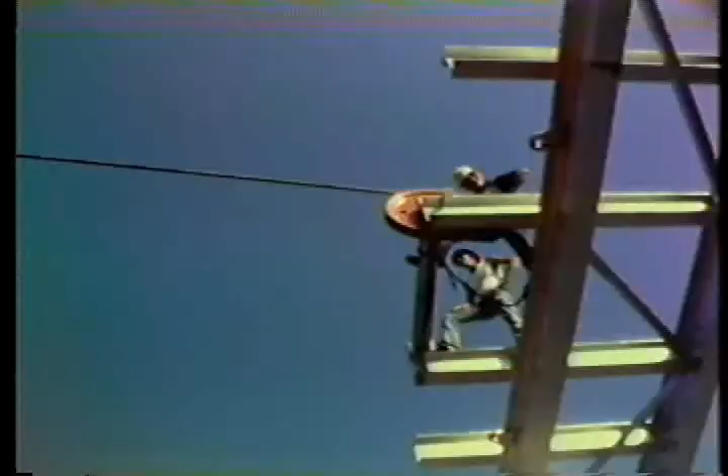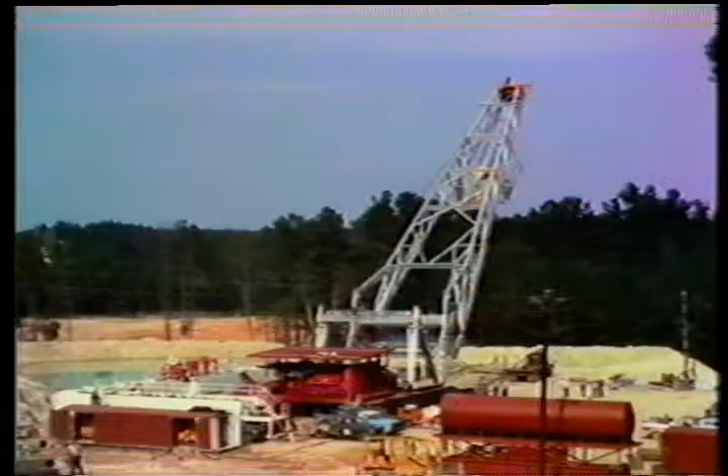We'll look at how your equipment affects the life and reliability of the drilling line. We'll show you what you can do to extend the service life of the line and avoid damage that could jeopardize your safety. In a minute, we'll look at the deadline anchor, deadline stabilizers, crown block, traveling block, wireline guide, and the various parts of the drawworks.

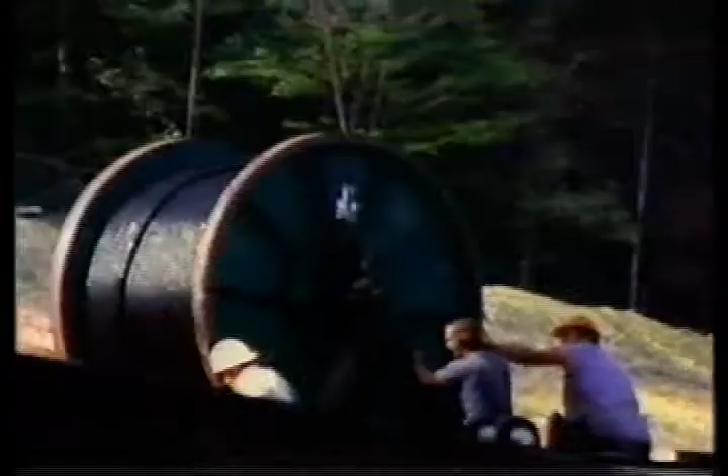Let's start at the beginning, when a new drilling line is delivered to the rig. When a line is delivered to you, inspect the outside layer for damage. If it wasn't loaded or tied down properly, there could be broken wires called wickers, or there could be flattened strands. When a spool is loaded properly, the load chains are not in contact with the wire rope where they could cause damage. When unloading, don't roll the line through mud or water or over sharp objects.

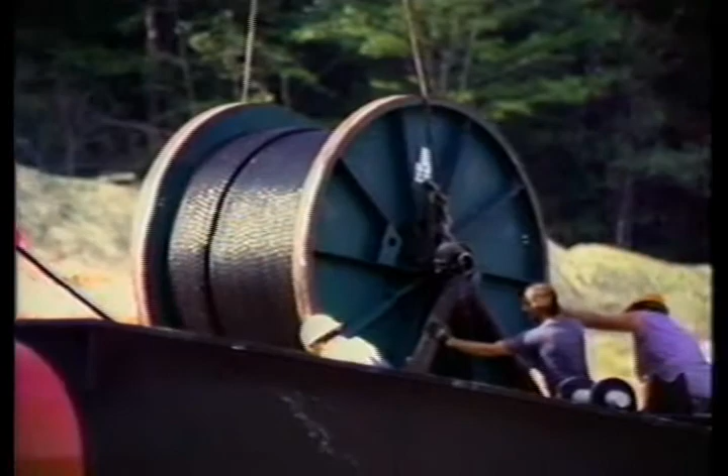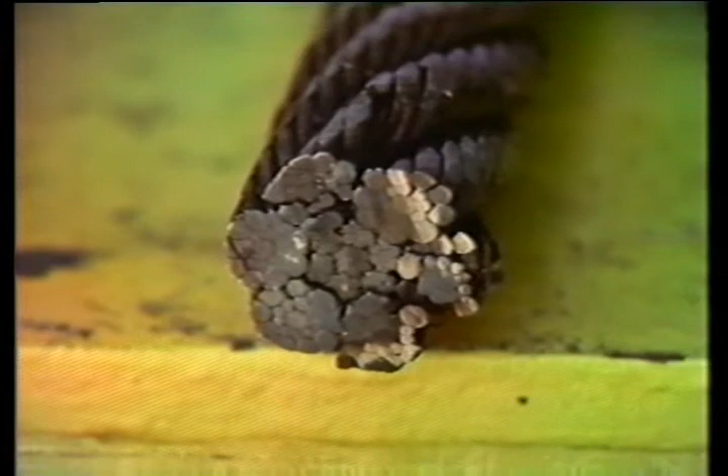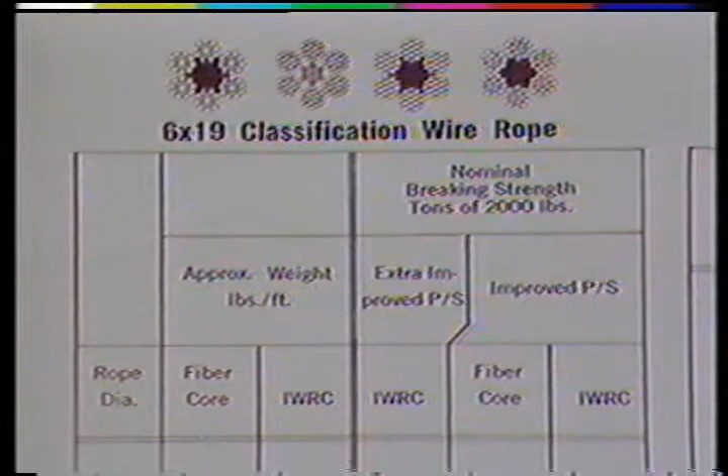A new line should be tagged with its size. If there's ever any doubt about the diameter, measure it. A 1 3/8 inch line can look an awful lot like a 1 1/2 inch line. The diameter is critical because it must match the sheaves on the crown and traveling block. If it doesn't match, you'll have excessive wear. The diameter of the line is also important as it relates to the breaking strength of the line.

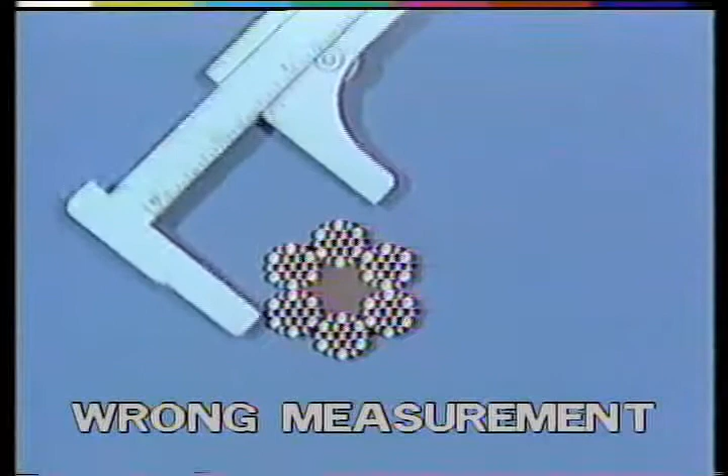Measure the largest diameter of the line. Here, the calipers are set across the valleys between strands. The reading will be wrong. If your calipers will just rotate around the line, then you have the right setting. Try to keep the line out of the dirt between the reel and deadline anchor. Lay some boards down if there's any distance in between.

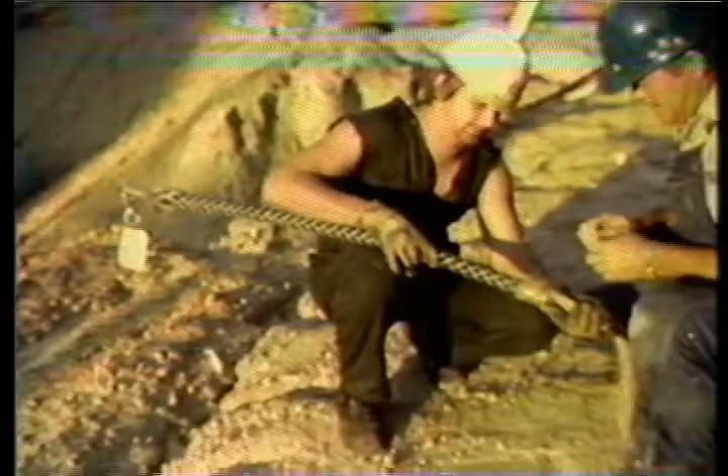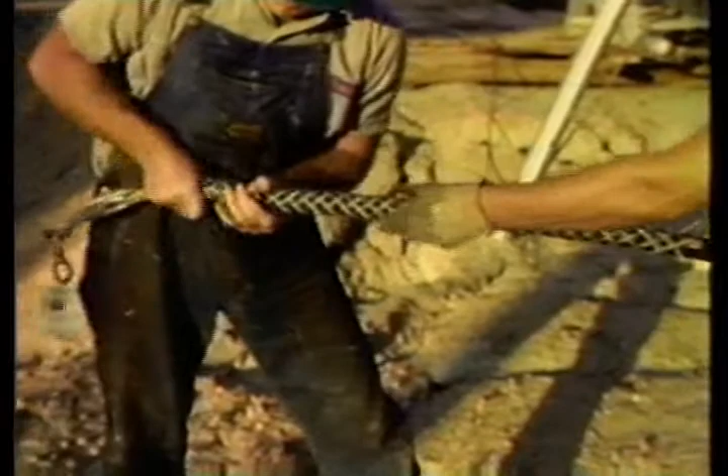Here's a crew stringing up a new drilling line. Since this is a new rig, the crew strings a manila rope through the blocks in order to pull the drilling line through. They use a snake to fasten the rope and drilling line together. If we were simply replacing an old drilling line with a new one, the crew would attach the end of the new line to the dead end of the old drilling line using the snake. By using the drawworks to reel in the old line, the new line would follow, making for a quick and easy string up. Okay, we've got our snake secure.

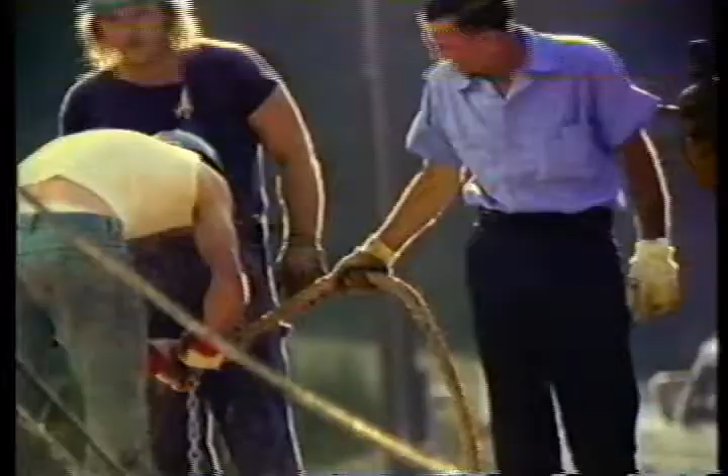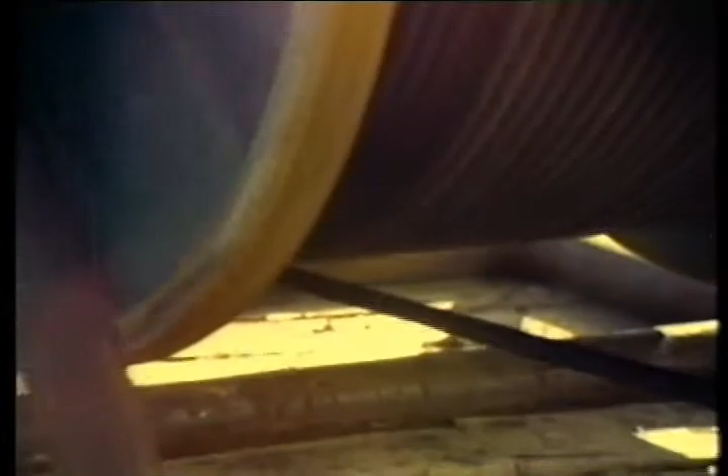A truck is being used here, but a hoist, winch, or cathead can also be used to pull the rope, which pulls the drilling line through each sheave. Notice that the supply reel was placed on the drilling line stand so that the line feeds off the bottom of the reel. If the reel unspools too fast, we just have some loose wraps on the reel. But if we had placed the reel incorrectly with the line feeding off the top, we'd have loops on the ground that could kink.

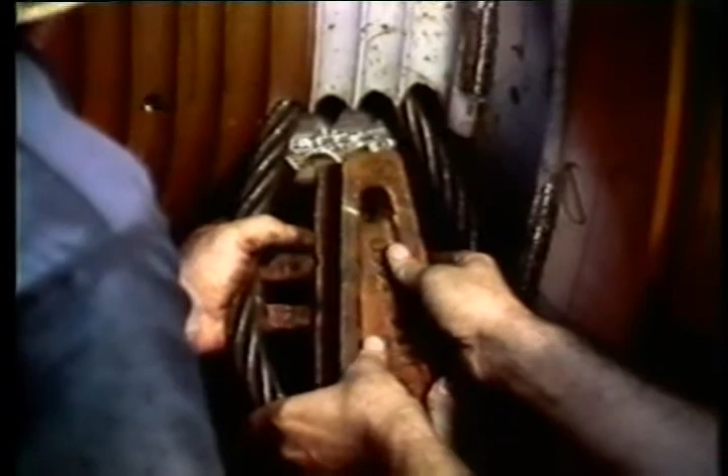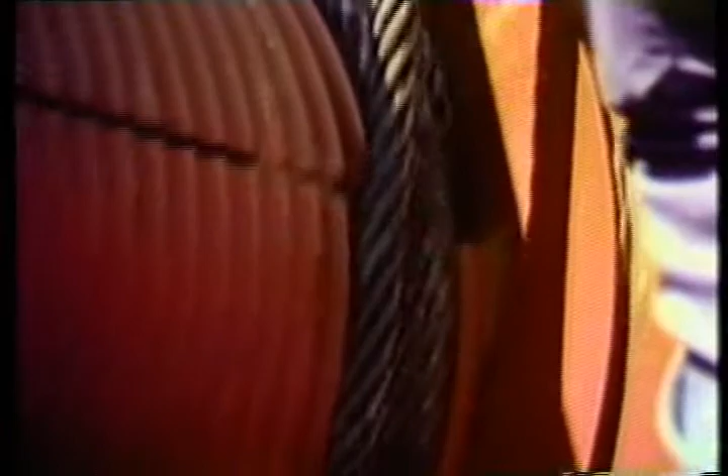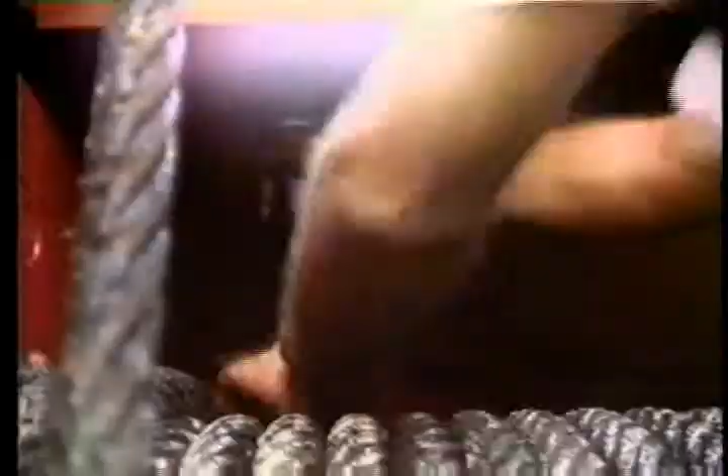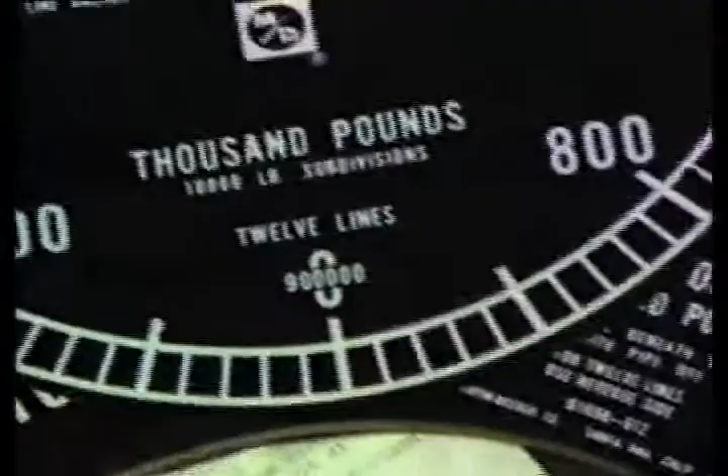It's important that these wraps be tight so that the next layer of line won't cut in between the wraps. As a general rule, you want about 12 wraps of line on the drum with the traveling block at the pickup point. It's absolutely essential that you remember to set the crown-o-matic after string up, after cut off, and after running unusually long stands. And always be sure you string up enough lines for the job. Likewise, don't pull near the capacity of the line. A total hook load over 300,000 pounds is pretty hefty and worthy of some attention.

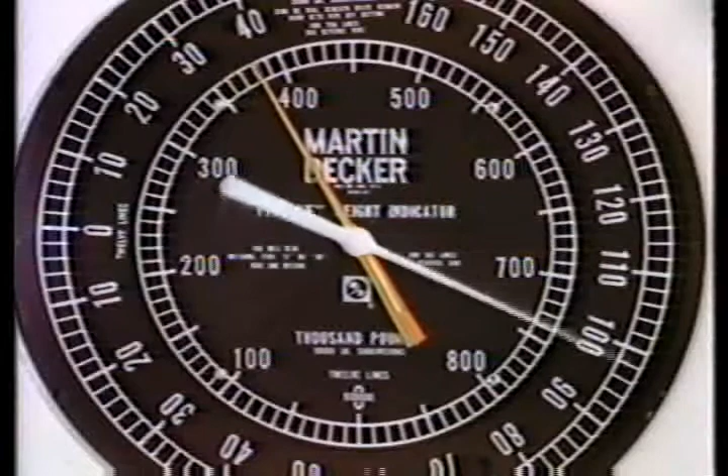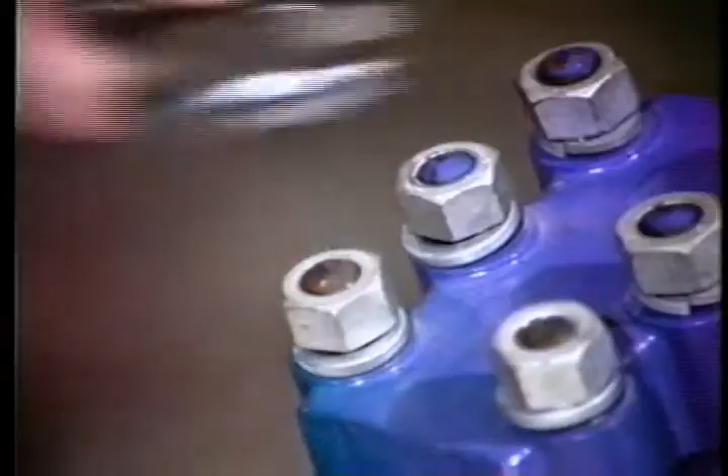Now let's look at the line handling equipment. It's obvious that you have to loosen the deadline anchor whenever you're slipping new line into the derrick. Make sure that you retighten this anchor before you release the traveling block from its hang line. The anchor has soft brass inserts to protect the line. When they lose their concave shape, replace them so they won't damage the line.

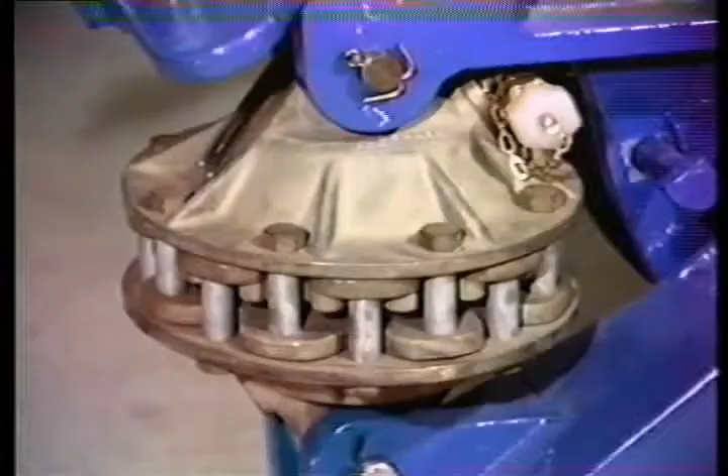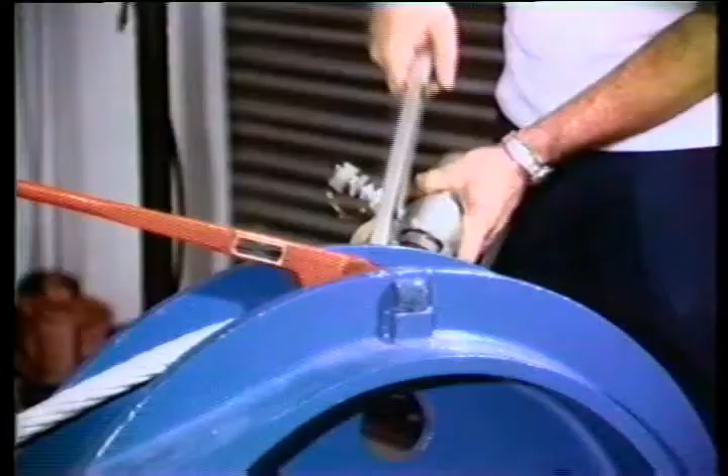The sensator for the weight indicator is installed on the anchor. When a weight is put on the line, it pulls here, and the anchor pivots on this pin. This slight movement will be detected by the sensator. In order to keep the weight indicator accurate, it's important that the anchor pivots freely. Keep the anchor and pin clear of dirt, mud, or ice. And grease the anchor often. You can't over-grease it. And free movement at the pin is crucial to the operation of the weight indicator.

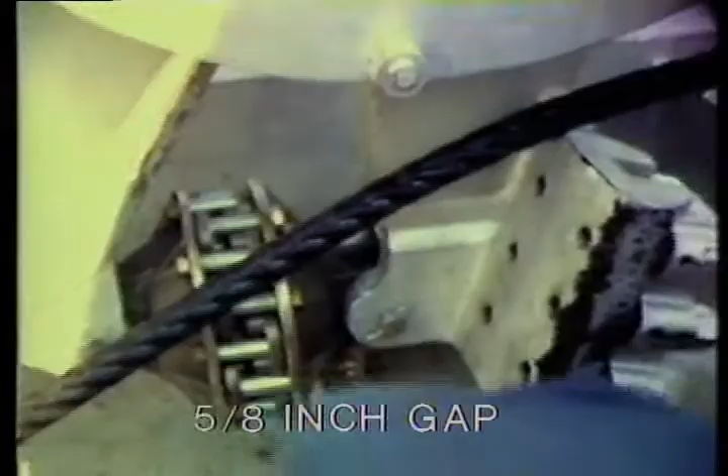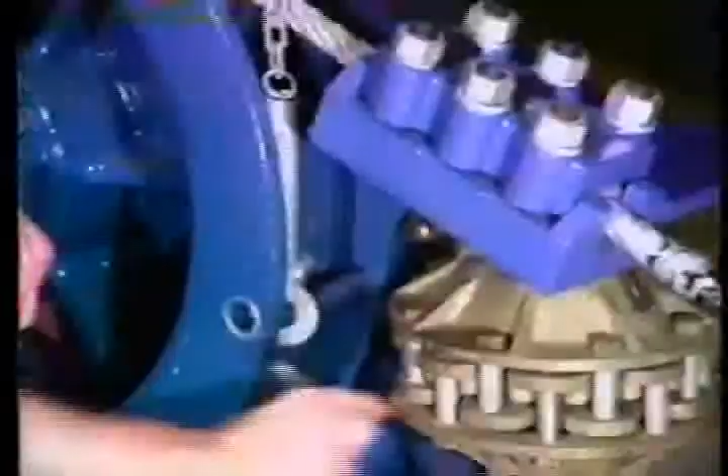To ensure accuracy, make sure this gap in the sensator is about 5/8 of an inch. With empty blocks, you should just be able to stick your finger in the gap. If it gets under a 1/2 inch, your weight readings will be wrong, so you'll need to pump more pressure into the sensator. First, remove the cap from the check valve. We put the pump on, just very loosely right at first.

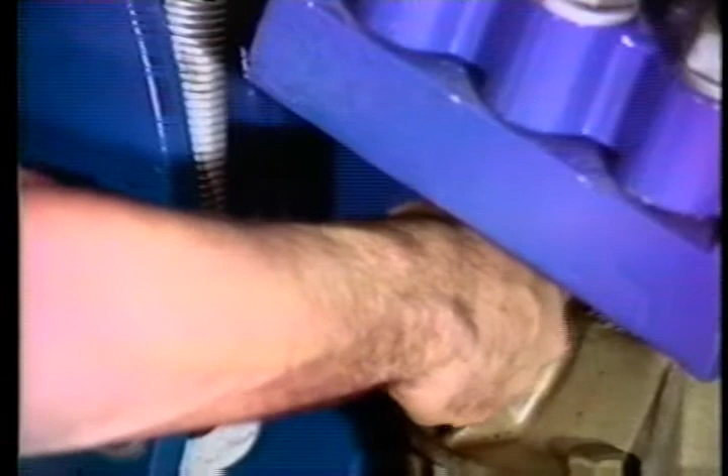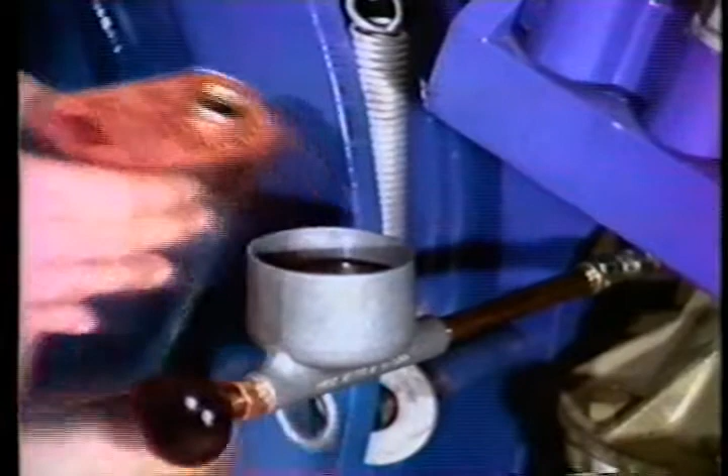Fill the pump with W15 fluid. Then we're going to purge the pump now. And the reason we do this is to keep from inducing more air into the system. You pump very slowly until you get this fluid leak right here coming out of there. Then we tighten just

snug. And then we go ahead and pump up the sensator until we get a gap here approximately equal. These three gaps approximately equal. And this is with the slip set and only the block weight. And after you've achieved that, remove the pump.

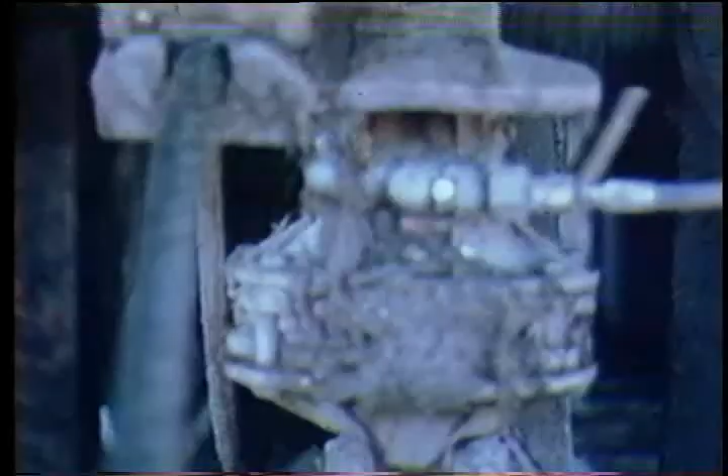Then replace the cap. And just put the cap back on just snug. It doesn't have to be real tight. Don't let your sensator stay in this condition. It has to be free to move when weight's put on the line, so hose the sensator off frequently.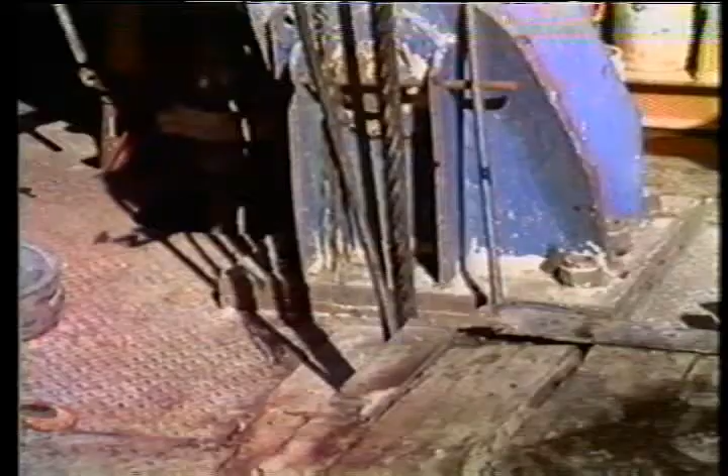A deadline stabilizer keeps the deadline from wobbling around. This will prevent some stress that can weaken the line. If you have stabilizers, use them. Let's follow the deadline on up to the crown. The crown block sheaves should be greased daily.

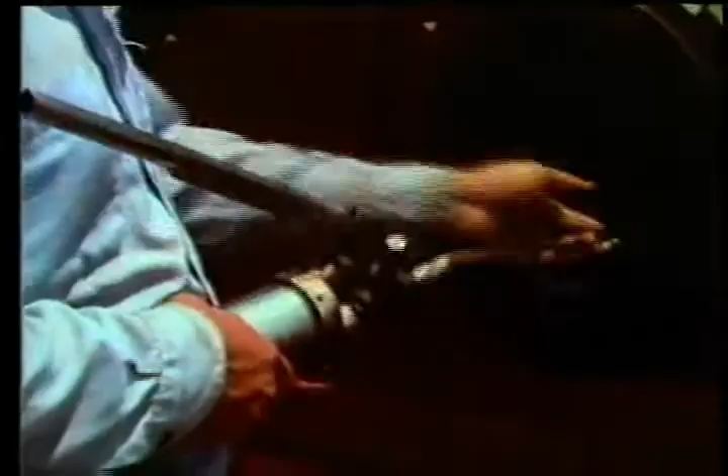Occasionally check the sheave grooves for wear. Using a groove gauge, if you see light under the gauge, the sheave is worn too much. It should be regrooved or replaced. Also look for burrs, rough areas, or cracks. If a sheave has become corrugated with the pattern of the drilling line, it should be replaced. Likewise, check for broken flanges. Any of these problems can damage and break a line.

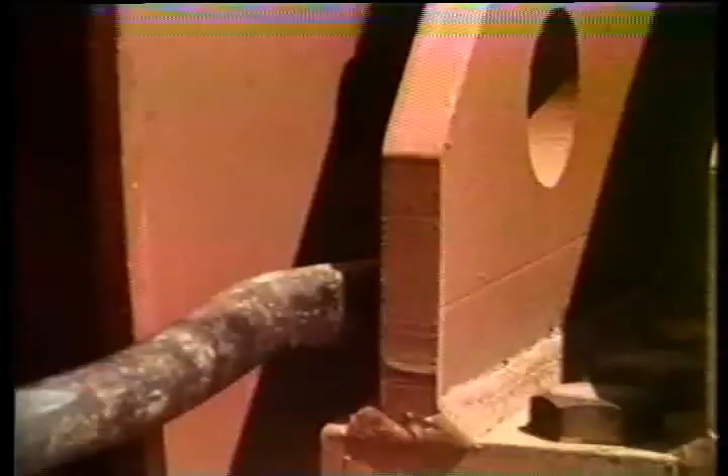Use a pry bar to check for play. Don't force it, but if there's obviously an 1/8 inch or more of loose play in the sheaves, the bearing or spacers may be bad. Report it to your tool pusher.

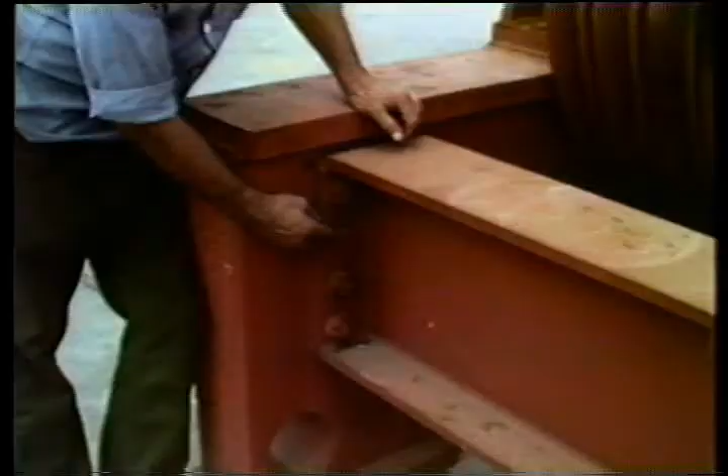While you're up there, make sure all the bolts are tight. Make sure that locking plate is on there, that the cap screws are in there, and that the locking wire is still in the cap screws. This one looks all right, so we don't have any concern for it for today anyhow.

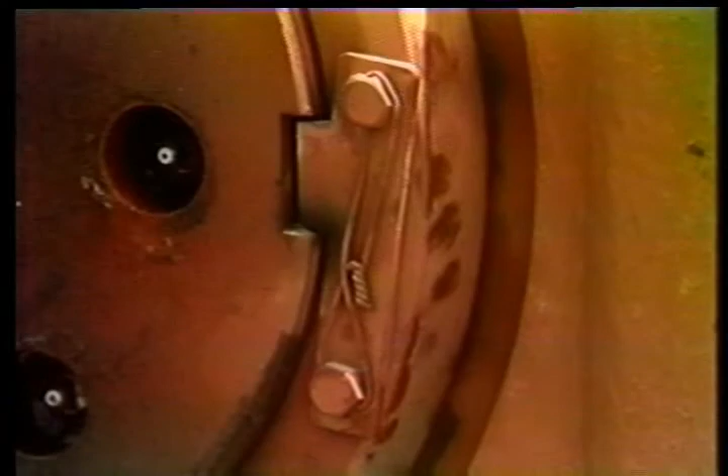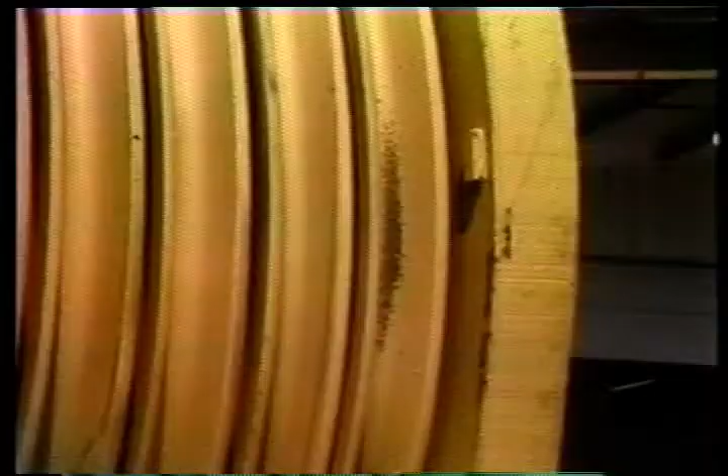Do the same thing on the traveling block. You have to swing these guards down to do a thorough inspection. Look for the same types of damage we looked for on the crown, things that can damage the drilling line. Check the sheaves for excessive play, too. Check the grooves for wear.

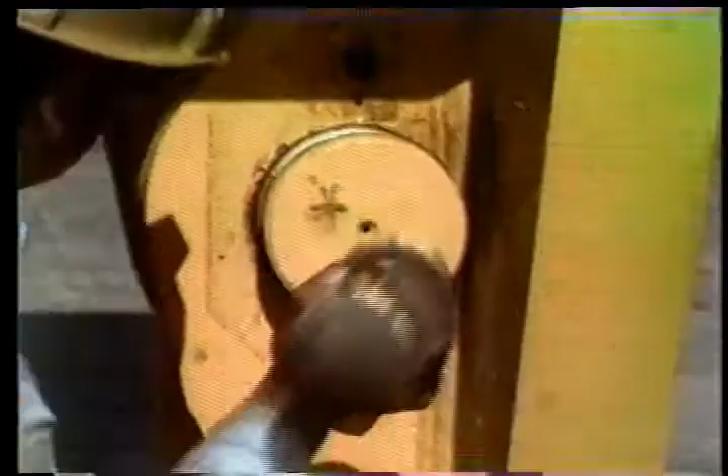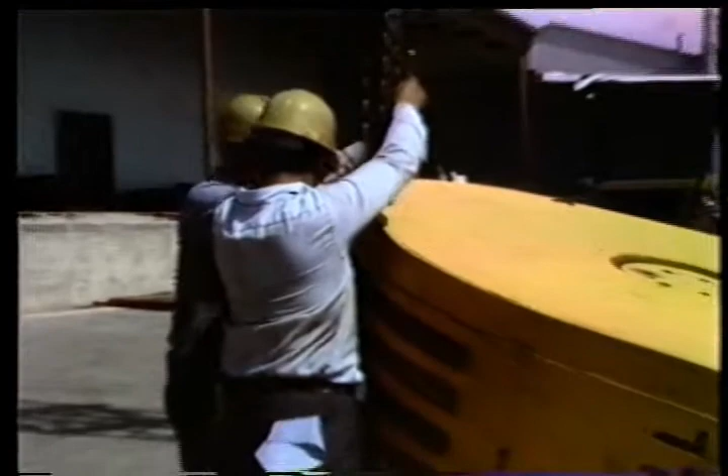Make sure the locking plate is in place on the pin. Look for cracks and check the welds. The clevis pins should fit tightly. And be sure to put the guards on tight. On a land rig, turn the block around occasionally so the slow-speed sheave becomes the high-speed sheave. And don't forget to grease the sheaves.

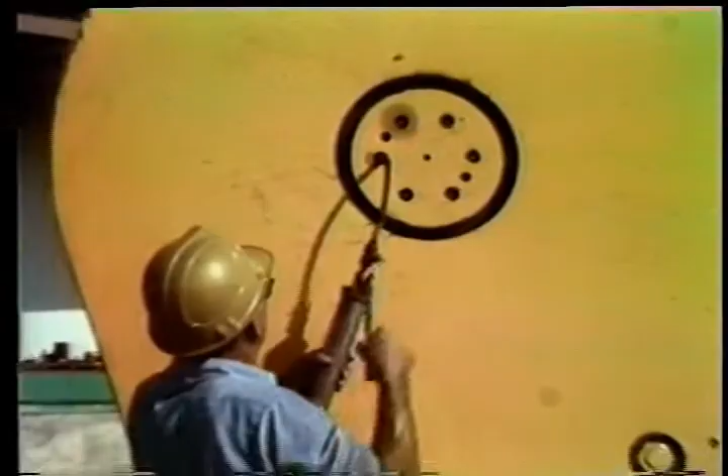The wireline guide attaches to the derrick and fits around the fast line to prevent excessive flopping. If your derrick requires one, make sure it's installed at the right height and be sure it's in good condition. The safety line should always be secured.

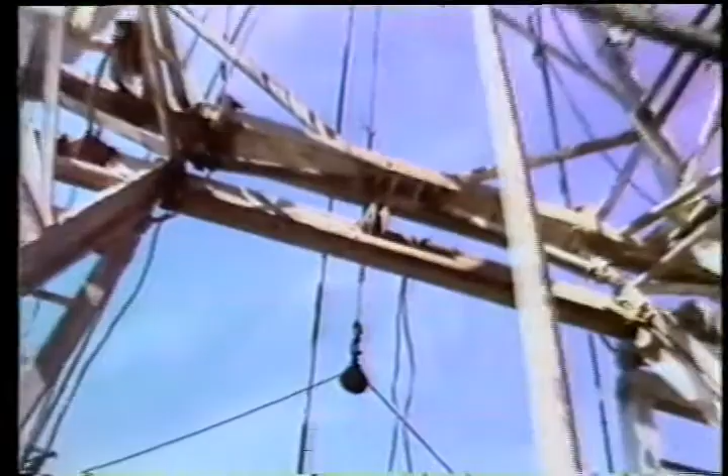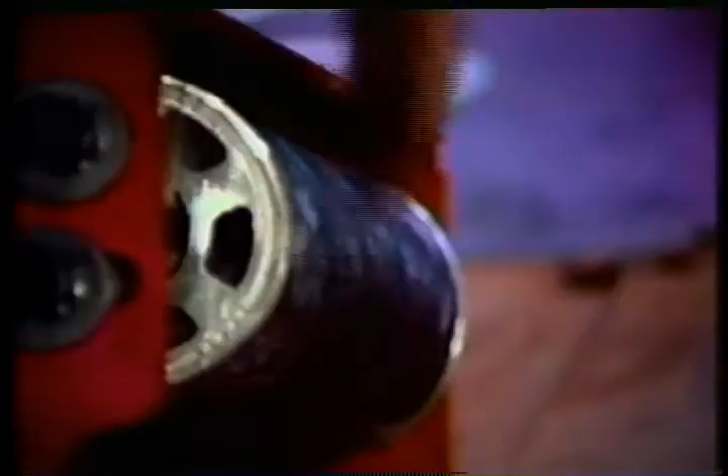Your drawworks should have wireline turnbacks to keep the line from beating against the drum flanges. These will save your line and the drum from rapid wear. Make sure they're set in enough to protect the drum flanges. Check the rubber rollers. They should turn freely, and when this rubber wears down, they should be replaced.

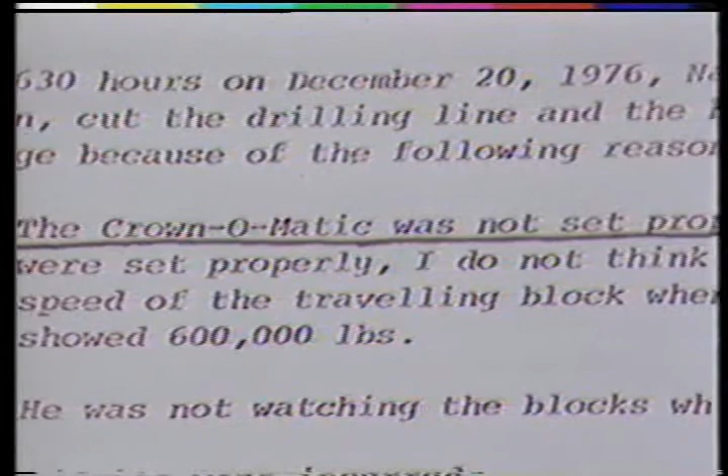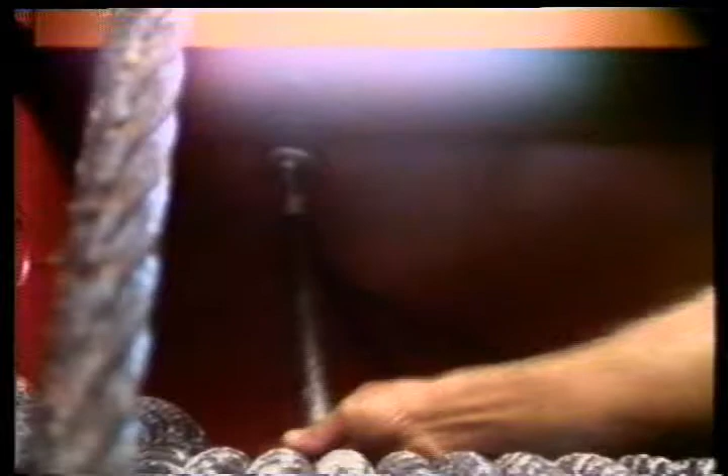We can't stress too much the importance of the Crown-O-Matic. So many drilling line and block accidents result from forgetting to set it. The Crown-O-Matic automatically sets the brakes and shuts off air to the driller's panel when a preset amount of line is wound on the drawworks. Its purpose is to keep the traveling block from being pulled into the crown accidentally.

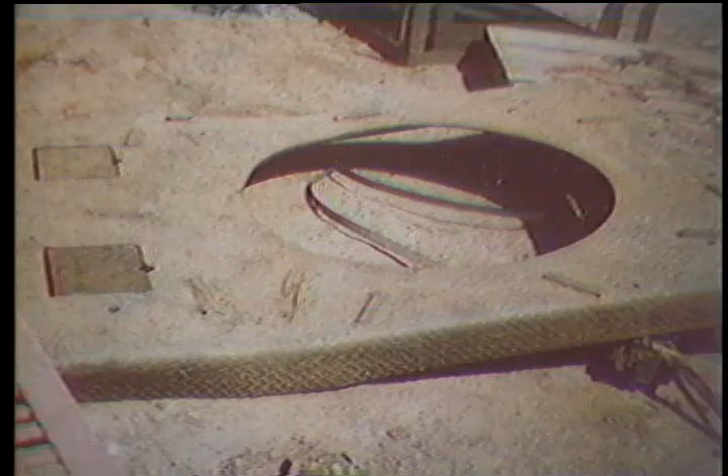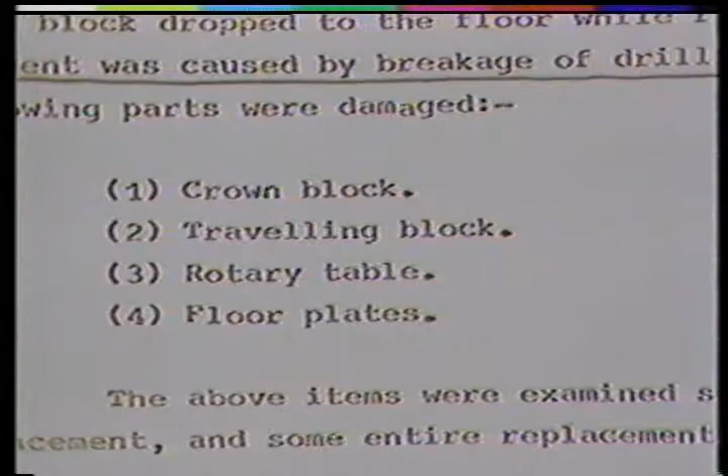Well, make sure it works. And adjust it to actuate when the traveling block's at a safe distance below the crown. If you're picking up an unusually long stand, you may have to relocate or shut off the Crown-O-Matic. And the tour before you might have done the same thing. So check it when you come on tour and whenever you cut the line. If you don't set it, you may find out what happens when a drilling line breaks. For information on setting and resetting the Crown-O-Matic and maintaining it, see Sedco's program on the Crown-O-Matic.

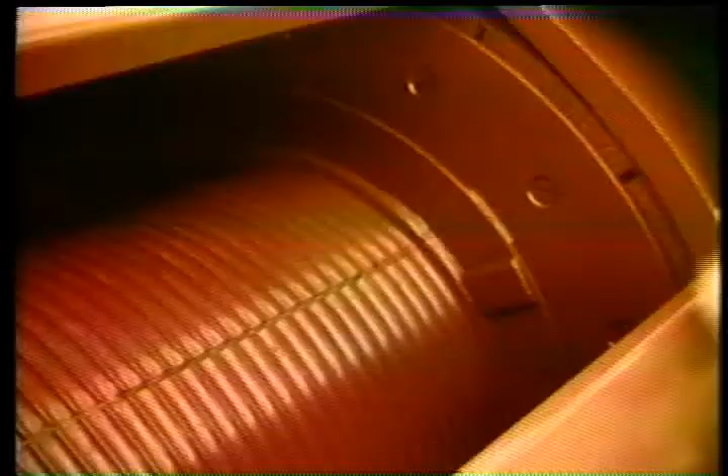Whenever you've got the line off your drawworks, check it out. Look for damaged grooving. Inspect the wear plates. Sooner or later, they'll wear to the point they need replacing. A worn wear plate sets the line off course. You'll see the line sparking as it rubs on the bed layer of line. The result? Extreme crossover damage.

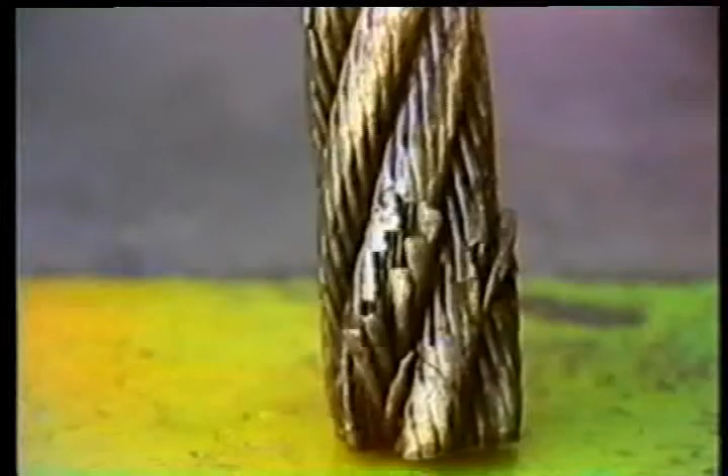Remember the 3 steps to maintaining a safe, dependable drilling line? The first 2 steps we covered in part 1 of this series. Step 1 is a good cutoff program. Step 2 is visual inspection of the drilling line. The third step to dependable drilling line is equipment maintenance. Keep the inserts on the anchor concave. Use deadline stabilizers.

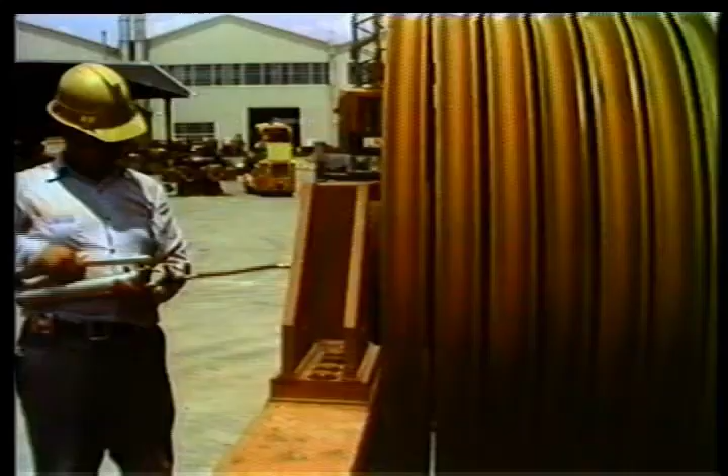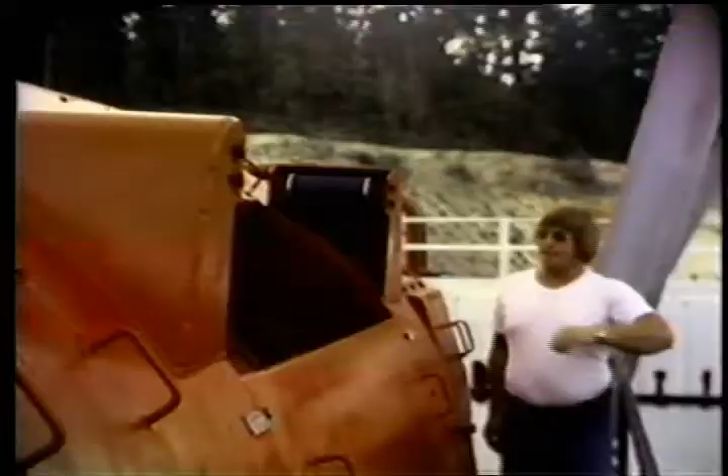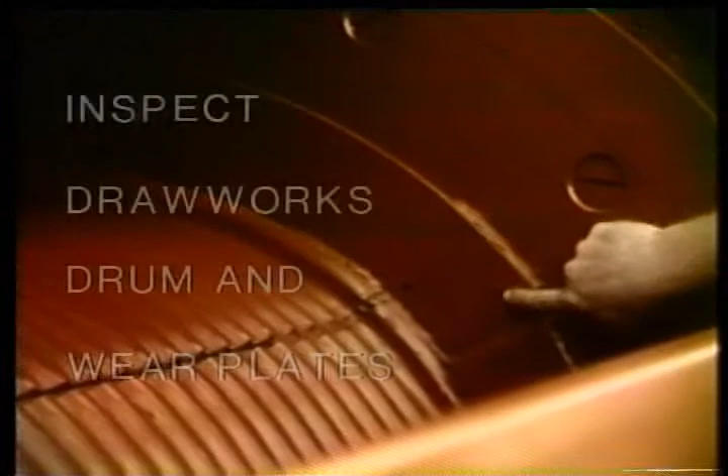Inspect the crown sheaves often. Keep them greased. Inspect and grease the traveling block sheaves too. If there's no guide system built into your derrick, you should have a wireline guide. Your drawworks should have turnbacks. They should roll freely. Replace the rollers if the rubber wears off. Inspect the grooving and wear plates on your drawworks whenever you have the chance.

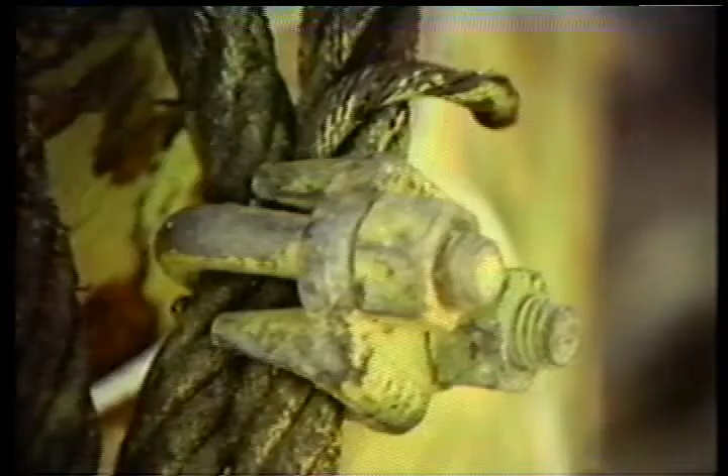Set that Crown-O-Matic. Keep it set and check it often. You'll avoid a tragic accident that could cost a lot in time, money, and lives. Use your good common sense. If your safety is in doubt, let your driller or tool pusher know. Report any damage or damaging conditions. Your life could be hanging by that drilling line.